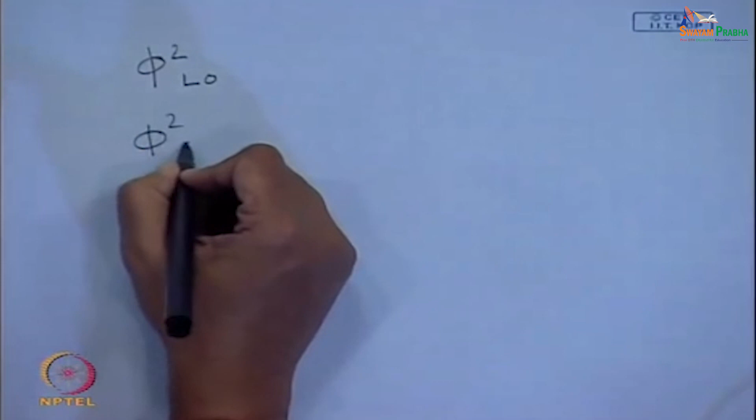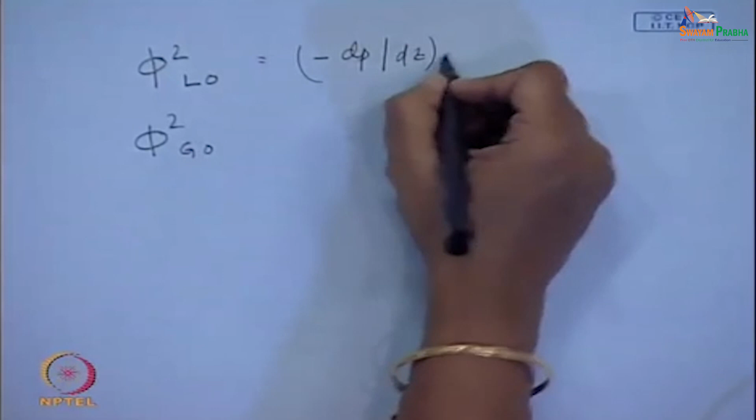The first one was phi square LO. Remember, these subscripts usually we use as capital. Then there was phi square GO, usually we use them in terms of liquid. This is minus dP dz divided by minus dP dz when the entire mixture flows as liquid.

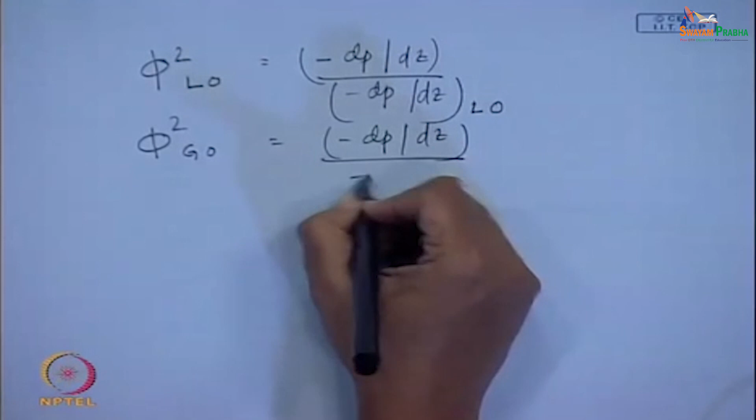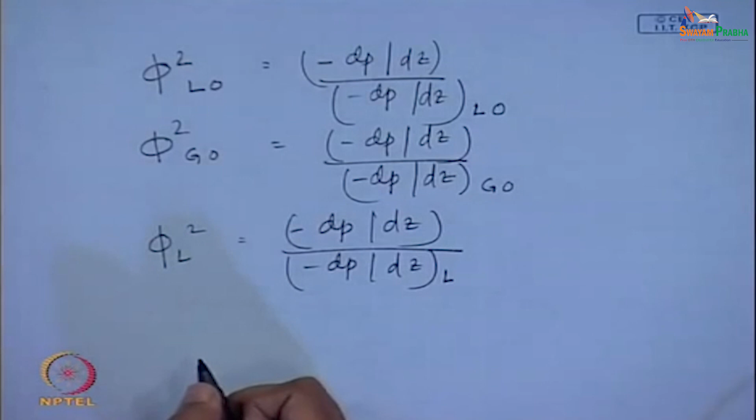Okay, this was just from analogy, expressed as a ratio of the entire mixture flowing as gas. And then we had phi L square, where the liquid portion of the mixture is expressed as a ratio of the liquid portion of the mixture flowing alone in the pipe, and phi G square, which is the gas portion of the mixture flowing alone in the pipe. So these were the 4 definitions that we had already given.

At this particular juncture, I would like to mention that usually these correlations are expressed in terms of phi L square and phi G square. The basic assumptions on which the empirical relationships for frictional pressure gradient are based are 3: constant but not necessarily equal velocities for gas and liquid phases, attainment of thermodynamic equilibrium between the phases, and use of empirical correlations or simplified concepts to relate the two phase multiplier as well as void fraction alpha to independent variables of flow.

So first we would like to relate the two phase multiplier, and then naturally if the two phase multiplier is related with that particular parameter, alpha should also be related. Accordingly, we will find out empirical correlations to relate the two phase multiplier as well as the void fraction to independent variables of flow.

Once this can be done, we find that the frictional pressure gradient can also be calculated, and once alpha is known, rho Tp can also be calculated, u1 and u2 can also be calculated. Therefore, the frictional pressure gradient can be obtained from this particular equation.

Now, here I would like to mention that out of the 4 definitions of phi square which I have already written down just now, usually we adopt phi L square and phi G square, rather we correlate phi L square and phi G square for our purpose.

We do not use phi LO and phi GO; usually these are used when we encounter change of phases, or when there is boiling, condensation, etc., when a single phase, say a saturated liquid or a saturated vapor is entering and change of phase occurs. Under that condition, if we take phi LO square, phi GO square, then it is much more convenient, because the liquid or the vapor was flowing alone in the tube at the entry condition.

But under normal circumstances, when we are developing the two phase multiplier correlations from the separated flow model, we assume from the very beginning both phases are present. In that case, we have found it much more convenient to use phi L square and phi G square. Why is it more convenient?

Because we will soon see that these two multipliers conform to certain limiting conditions which are not obeyed by phi square LO and phi square GO. Just because of that, we would like to prefer to correlate phi L square and phi G square. Now, what are those limiting conditions? Let us see what are those limiting conditions.

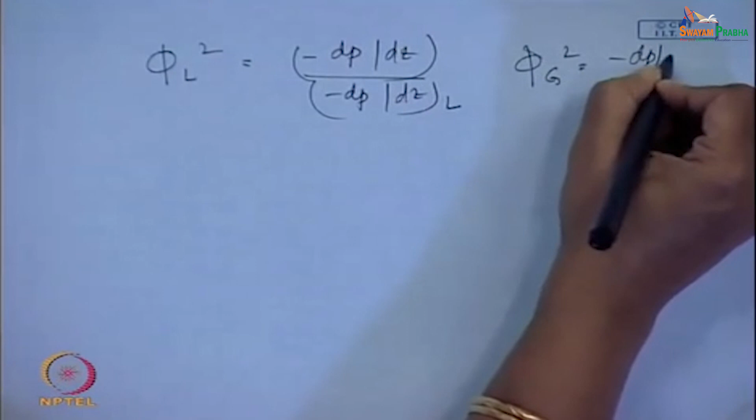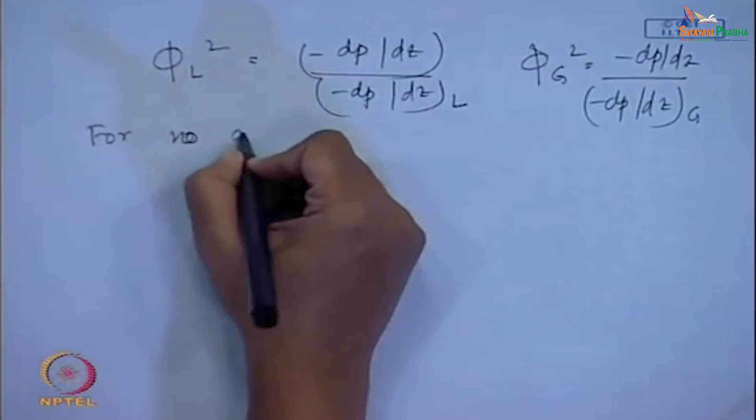Now, for no gas flow, what will you get? Let me write down the definitions once more. Phi L square equals minus dP dz by minus dP dz liquid. Phi G square is minus dP dz by minus dP dz gas. Now tell me, for no gas flow, what will you get? What should be the value of phi L square and phi G square for no gas flow?

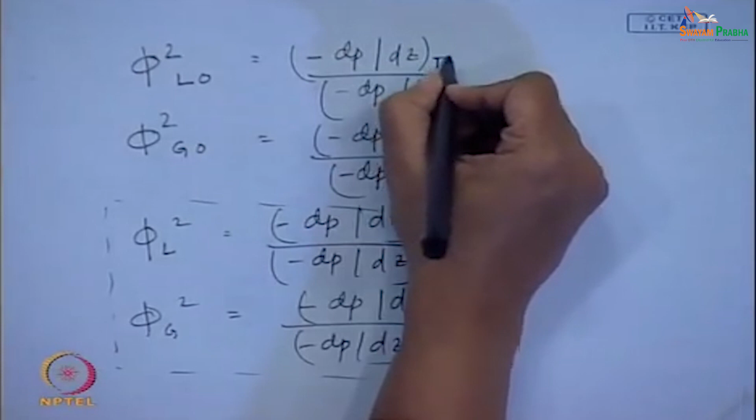What is 1 by phi L square equal to for that particular case? Only for no gas flow, meaning only liquid is flowing. So 1 by phi L square will be equal to, since only liquid is flowing. So therefore, these are all two phase pressure gradient. Here also I would like to make the changes, they are all two phase pressure gradient.

I am very sorry, in case I miss it, just remember that they are all two phase pressure gradient. Now, you tell me, when there is no gas flow, then naturally it is only liquid which is flowing through the pipe, isn't it? So therefore, under that condition, 1 by phi L square becomes 1.0. And what about 1 by phi G square? It becomes 0. Just for this I have defined them not as phi L square and phi G square, but as 1 by phi L square and 1 by phi G square.

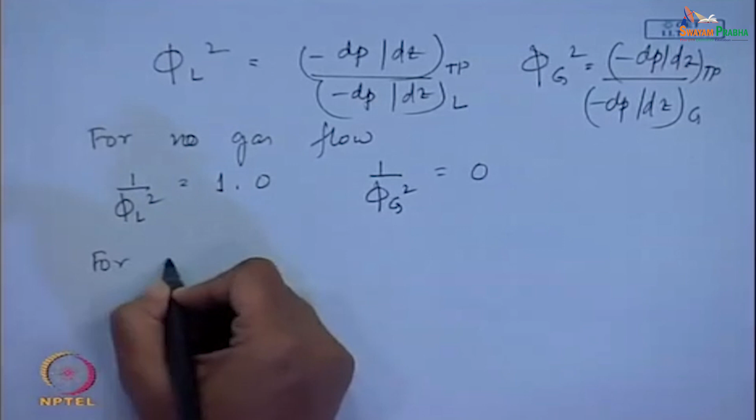Similarly, for no liquid flow, I also have them in my presentation. You can see the PPT which I have prepared.

Here also for no liquid flow, naturally what do you have? It is 1 by phi G square equals to 1 and 1 by phi L square equals to 0. Remember, these are the limiting conditions which phi LO square and phi GO square would not have conformed to. So when there was no liquid flow also, we would find some value of phi square LO.

Because what do we assume there? We assume that the entire mixture is flowing as liquid. So when there is no gas flow also, the liquid flow would be there. Do you understand? So such limiting conditions would not have been subscribed by your phi square LO and phi square GO.

Another limiting condition that is also obeyed by this is the relationship between phi L square and phi G square at the critical point. All of you know what is the critical point? What happens at the critical point?

The two phases cannot be distinguished at the critical point, that is the definition. Why does that happen? Rho 1 becomes equal to rho 2, mu 1 becomes equal to mu 2, and therefore all the properties of the two phases become identical.

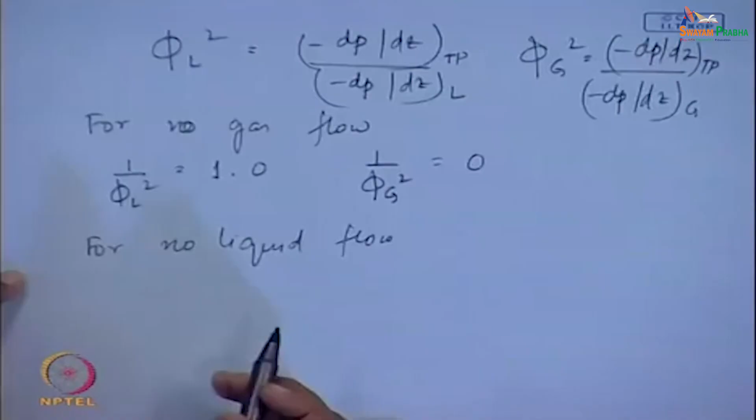Now let us see how the relationship between phi L square and phi G square change at the critical point. What is the basic definition of these two? So here I will just complete it. This was 1 by phi L square equals to 0 and this was 1 by phi G square equals to 1.

Anyhow, now at the critical point, what do you get? We find that at the critical point, or rather let us first find out the expression and then we will be substituting the expressions for the critical point.

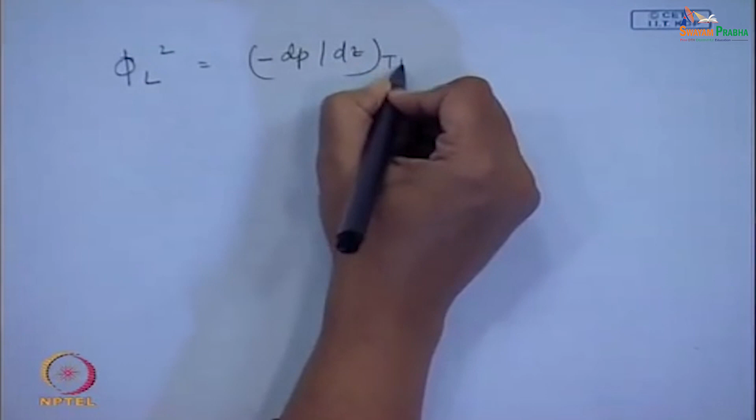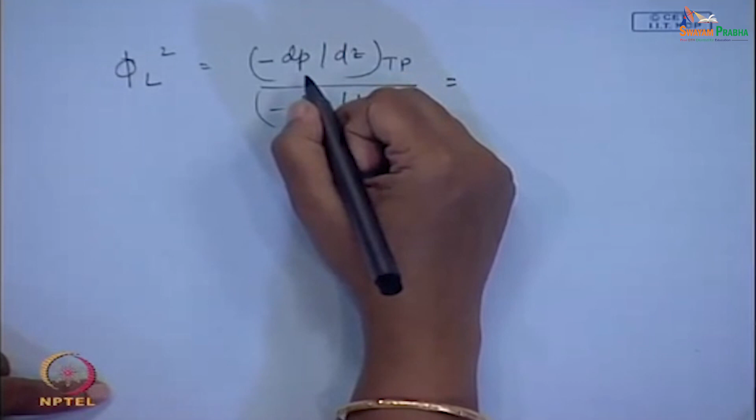So what is the definition of phi L square? It is, as I have just now written down, the two phase pressure drop divided by the pressure drop when the liquid flows alone in the pipe. Now if we substitute the basic definition, there is one more thing which I had forgotten to mention.

Now these empirical approaches have been derived under certain conditions. If you observe, these particular derivations have been derived under conditions of no phase change, no acceleration pressure drop, and negligible body force effects. That means, for a horizontal pipe under isothermal two component flows. Do you agree with me? It has to be a horizontal pipe under two component isothermal flow.

Yes or no? So if that is the case, then what do we find? Your g cos theta term cancels out. There is no acceleration pressure drop, this term cancels out, and therefore under that condition your pressure gradient comprises only of the frictional pressure drop, is not it?

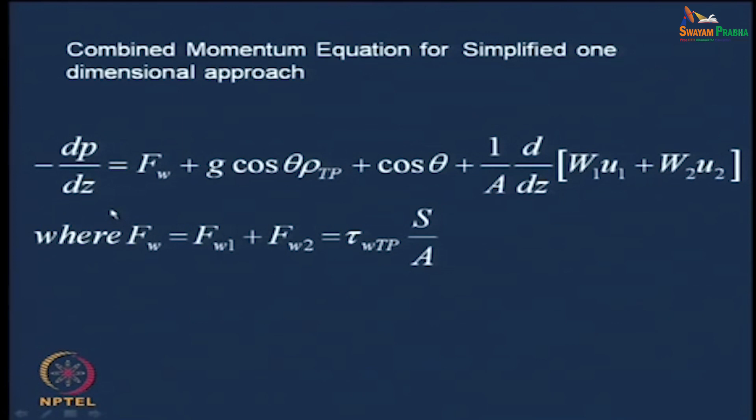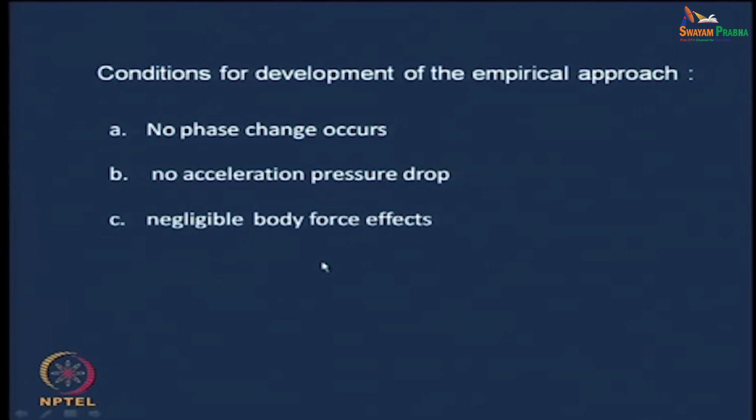So therefore we find that these particular correlations, most of the empirical approaches, have been developed under conditions of no phase change, no acceleration pressure drop, and negligible body force effects, under which we can write minus dp dz two phase. This comprises of minus dp dz frictional component of the two phase.

So this can be written, and later on some modifications were there in order to incorporate effects when body force effects and acceleration pressure gradients become important. But naturally the more important they become, the less accurate these correlations become. So under this particular condition the correlations were developed.

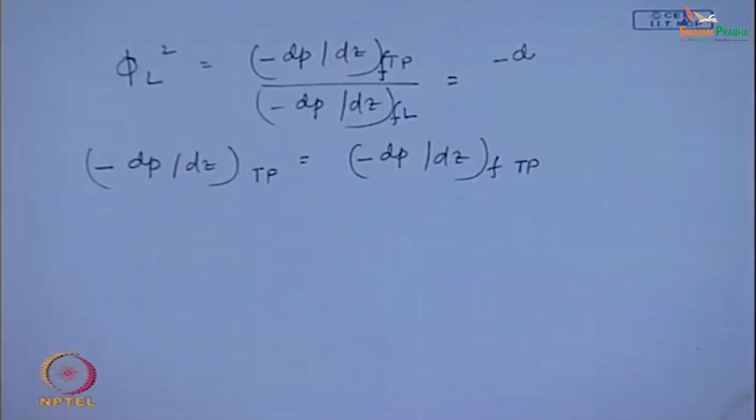So if this is applicable, then in that case your phi L square becomes - here only I will write down - this is frictional pressure gradient of two phase, and this also becomes frictional pressure gradient of the liquid phase, is not it? So therefore, by definition, what is this?

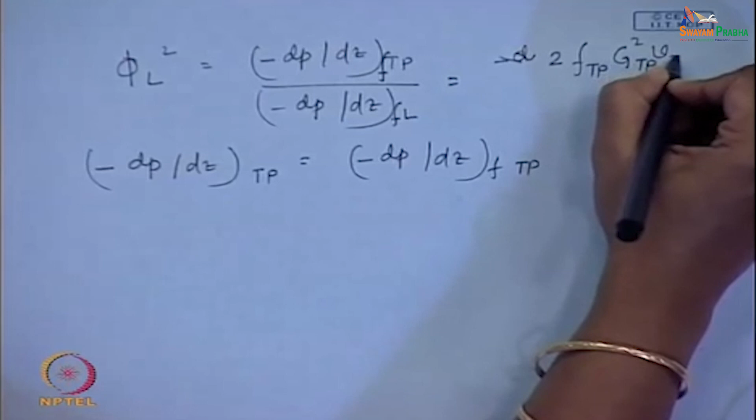By definition, this becomes 2 FTP, correct me if I am writing anything wrong, g square TP VTP by D, yes or no, divided by 2 FL g square TP into 1 minus x square, is not it?

This is the amount of liquid which is there - g into 1 minus x is the amount of liquid which is contained in the two phase mixture, right. This will be VL or V1, whatever you want, and this will be divided by D. Do you agree with what I have written, yes or no?

Fine. Same, or in other words, here in the same way your minus dp dz frictional for the gas phase, that also can be expressed in a similar way.

So therefore we find what is the expression of phi L square when these particular assumptions which I have written down in my transparency - under these assumptions, what is the expression of phi L - then we find that these cancel out, these cancel out, D cancels out. So therefore this reduces to FTP VTP by FL 1 minus x square VL, yes or no?

Is this portion clear to all of you? Fine. Now, at the critical point, what do you get?

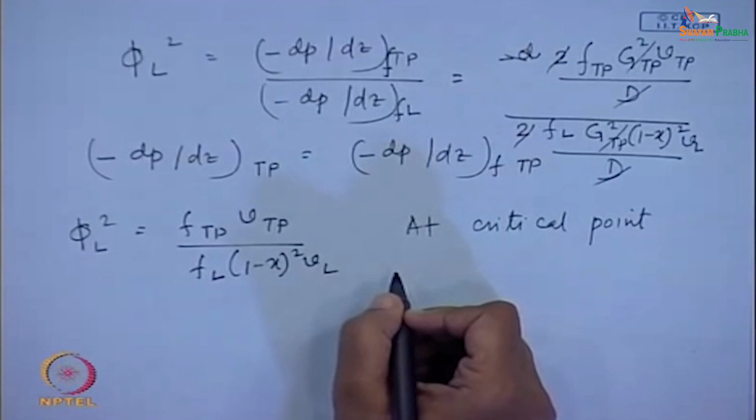At critical point, what do you get? Rho 1 equals to rho 2, or V1 equals to V2, is it not? So, therefore, V L equals to V G equals to V TP, yes or no? So, therefore, these two also cancel out. Do you get this?

Right, so therefore this becomes F TP by F L into 1 minus x whole square. Now, what is the expression of F TP? Can you tell me? This F TP is a function of Reynolds number. So, therefore, this becomes a function, or this is K mu TP by dg whole to the power minus n.

K mu TP by dg whole to the power minus n. You agree? Achha, same way F L, this is equal to K mu L by, we can write it in this dg into 1 minus x whole to the power minus n.

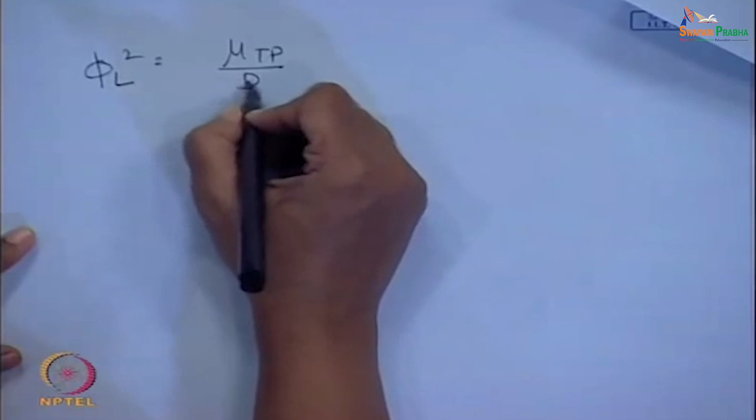Yes or no? So, therefore, here we can write it down as this is equal to - I have to shift to the next page - this is equal to phi L square, this is equal to mu TP by dg whole to the power minus n divided by mu L by dg into 1 minus x whole to the power minus n, 1 minus x square. This is the relationship which we get.

Again at the critical point, we know mu 1 equals to mu 2 equals to mu TP. So, therefore, at critical point what do we get? Mu TP's, the mu's cancel out, dg they also cancel out.

Okay, fine. So, what is the final thing that you get for this particular case? What is the final expression that you get? It is 1 minus x whole to the power n by 1 minus x square. This is equal to phi L square. Yes or no? Just check up whether I am doing things correctly or not.

Okay, similarly, phi g square, what will you get? For phi g square, it is going to be x to the power n by x square will be equal to phi g square. So, we find that phi L, the relationship between... minus, what happened? It is all right only, is it not?

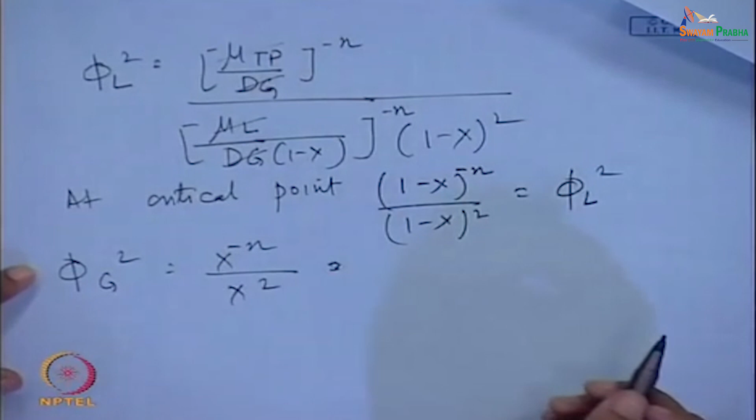Oh sorry, now here also I made this mistake, is it not? Minus n, sorry, very sorry. Fine, okay, in other words you can just write it down as minus n plus 2. Achha, so therefore what do we find?

That the relationship between phi L square and phi g square at the critical point will depend on whether the flow is laminar or turbulent. Yes or no? Okay, because we find that at the critical point, phi L square is a function of x and n, is it not? And in this particular case also it is a function of x and n. So, therefore, the relationship between phi L square and phi g square at the critical point will depend upon whether the flow is laminar or whether it is turbulent.

If it is laminar, then what do we get? For laminar flow, n equals to 1, very correct. So, therefore, phi L square will be equal to - come on - phi L square, it is going to be 1 minus x, 1 minus x only, whole to the power minus 1.

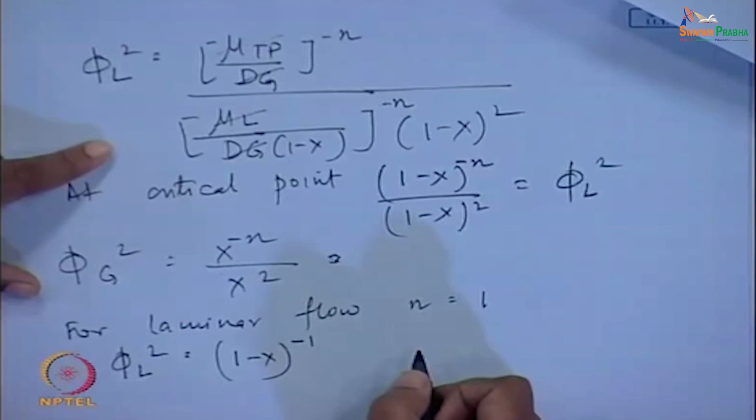Check it up, check it up. How can it be minus 3? Just check it. N is 1, so, therefore, this is 1 by phi L square if I make it, then in that case, okay, let me make it 1 by phi L square, then this is going to be 2. Just then probably I have made a mistake, just a minute, let me just check up, maybe somewhere there is a mistake which I have made.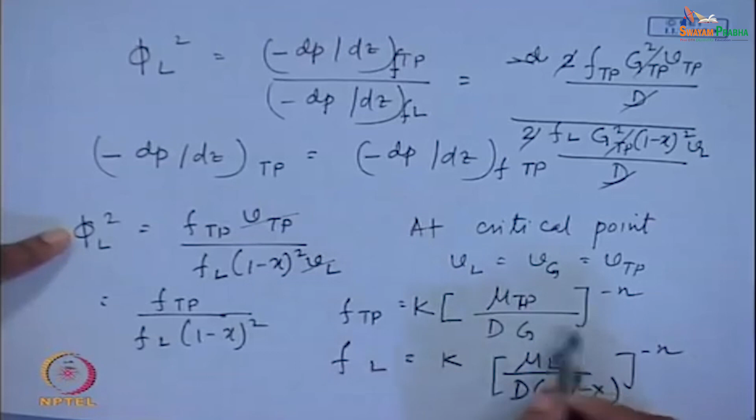Achha, FL by FTP, what did I get? There probably I have made a mistake. Achha, so suppose I start from the very beginning for the laminar flow, then this becomes minus 1. Suppose for laminar flow, if I start from the very beginning, okay. So, phi L square becomes - this is minus 1, this is minus 1 - and then in that case we get FL by FTP. In this particular case, what do we get? FL by FTP, this is equal to 1 by 1 minus x, very correct.

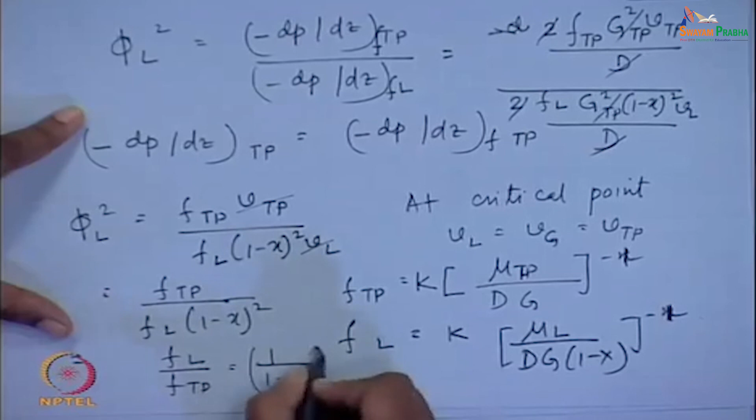Okay, and in the same way we will get, just a minute, where FL by FTP, next page. Oh, here na.

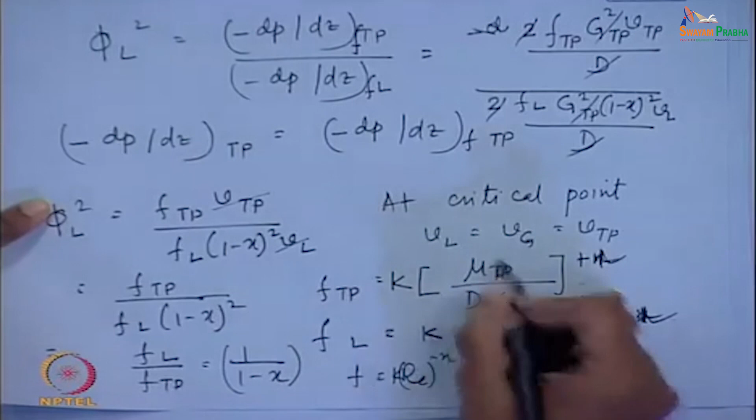No, here I had made a mistake, very sorry. This f equals to K RE to the power minus n - I had written 1 by RE, there I made a mistake. Since this is 1 by RE, it has to be plus n. None of you pointed out the mistake. From here itself I started making the errors. So this has to be plus n - is it correct? Because the relationship is f equals to K RE to the power, and I had already written 1 by RE in this particular case. There actually I made a mistake, I am very sorry about it. Now it is all right, is not it?

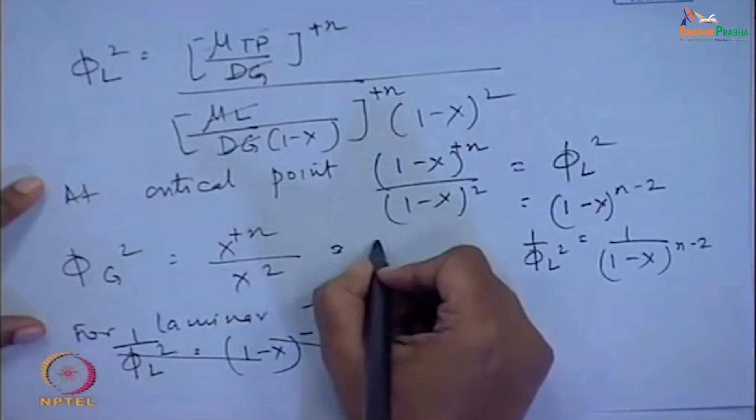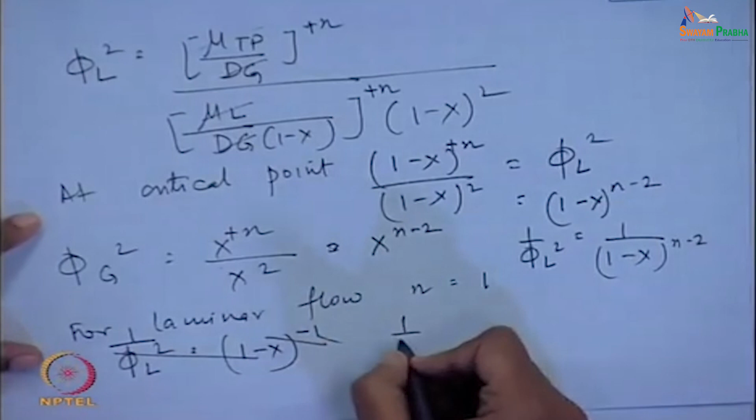Very sorry. So, phi L square equals to 1 minus x to the power n minus 2, or in other words 1 by phi L square equals to 1 by 1 minus x whole to the power n minus 2, and phi g square will be x to the power n minus 2. I have just made it the denominator. And this one is going to be 1 by phi - I am writing it as 1 because these two relationships will come out in a very straightforward manner.

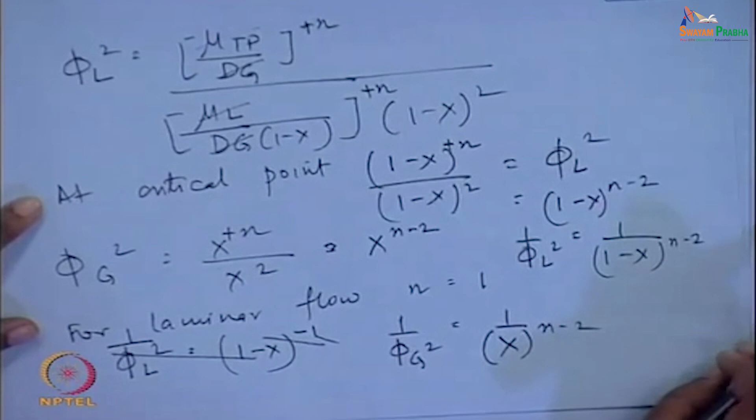Now, for laminar flow, what do you get? For laminar flow, your n equal to 1, is not it? So when you get n equal to 1, what do you get? One by phi L square - so you just do it and you see how you are getting plus: you add 1 by phi L square plus 1 by phi g square. This becomes 1 minus x plus x equal to 1 for laminar flow, correct.

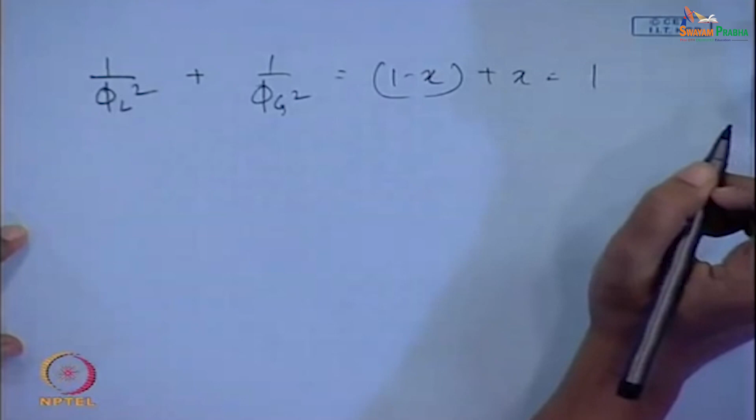For turbulent flow, suppose - this is for laminar flow, n equals to 1. Now for turbulent flow, what will you get? Turbulent flow, n equals to, generally for Blasius type of equation, if we use that, n equals to usually 1/4, is not it? So if you substitute that, we find that we calculate 1 by phi L square whole to the power 4 by 7 plus 1 by phi g square whole to the power 4 by 7, so that we can have a 1 at the end, just for that reason.

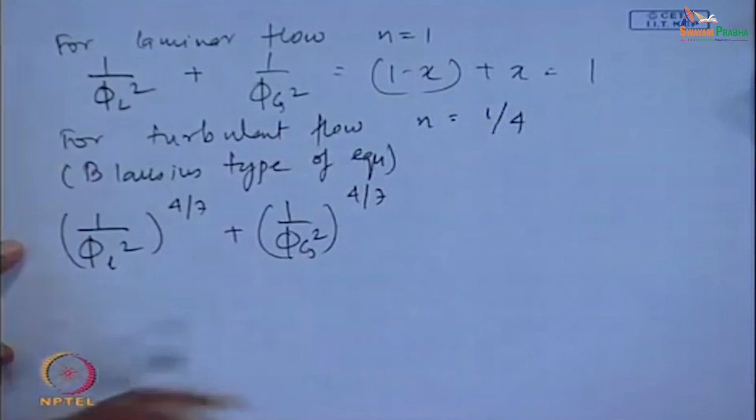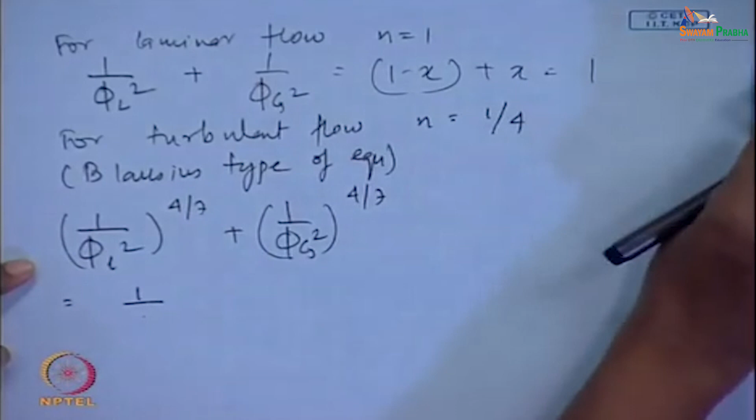If you just calculate it you can find out what you are getting - this will become 1 by... suppose in this particular case we know 1 by phi L square was 1 by 1 minus x whole to the power n, 1/4 minus 2, is not it, plus 1 by x to the power 1/4 minus 2. So in that case it is going to be 7 by 4, 7 by 4. So therefore this becomes equal to 1.

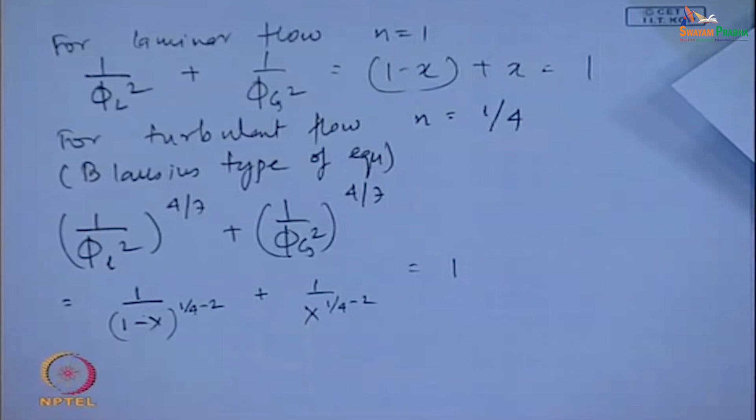So now is it clear what are the limiting conditions to which the relation between phi L square and phi g square conform? The limiting conditions, in a nutshell: for no gas flow, 1 by phi L square equals to 1 and 1 by phi g square equals to 0. Confusions remaining now? Just do the derivation. See, these are small derivations, they come just from single phase fluid flow - there is nothing two phase in this. But please remember, whenever you are doing any derivation for your exams, start from the very basics, start from the definitions, and then proceed. Remember this.

So in a nutshell, what are the limiting conditions of the correlation? For no gas flow, 1 by phi L square equals to 1, 1 by phi g square equals to 0. For no liquid flow, 1 by phi g square equals to 1 and 1 by phi L square equals to 0. And at the critical point we have two different relationships depending upon whether the two phases are in laminar flow or turbulent flow. For laminar flow, as is evident, it is 1 by phi L square plus 1 by phi g square equals to 1. For turbulent flow, assuming a Blasius type relationship, we get 1 by phi L square to the power 4 by 7 plus 1 by phi g square to the power 4 by 7 equals to 1. So remember, we have started deriving the relationships between the two phases - these things have more or less been covered.

Certain empirical correlations have been proposed. These empirical correlations relate phi L square and phi g square based on certain assumptions. The first assumption is that the flow occurs under isothermal two component flow conditions in horizontal pipes, or more explicitly, for conditions with negligible body forces, no acceleration pressure gradient, no phase change, and where the total pressure gradient comprises of the frictional component only. Under these circumstances, these derivations have been made.

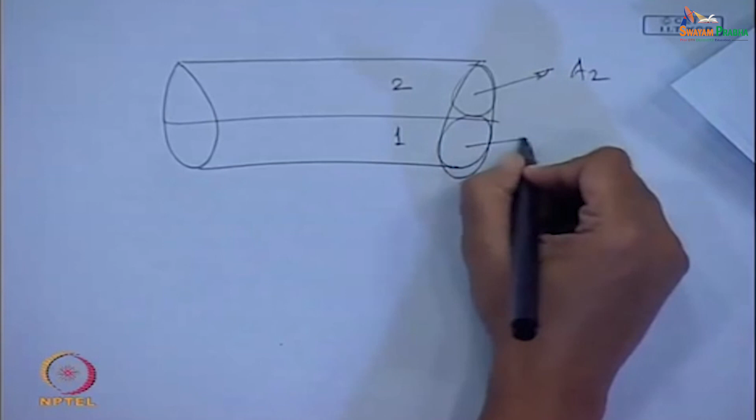What is the next assumption? Assumption 3: the pressure drop in each imagined cylinder is the same as in actual flow - quite natural. So imagine a pipe where fluid 2 is flowing here and fluid 1 is flowing here. We assume they are flowing in two separate cylinders such that the cross sectional areas add up to form the total cross sectional area of the pipe, which is pi by 4 d square.

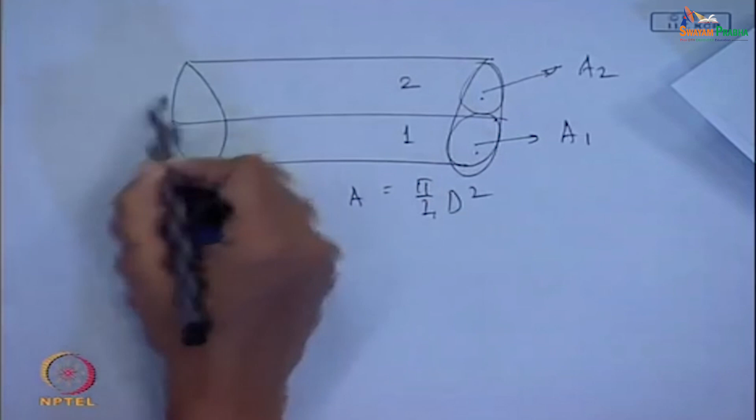The next assumption is that they do not interact at the interface - meaning they flow irrespective of the presence of the other, not knowing the other fluid is present. Under that condition, the pressure drop across cylinder 2 will equal the pressure drop across cylinder 1, which will equal the pressure drop across the total conduit - just like a parallel connection where voltages are the same. So considering this second assumption, the pressure gradient across the entire cylinder equals the pressure drop across the liquid cylinder, cylinder 1, which equals the pressure drop across the gas portion.

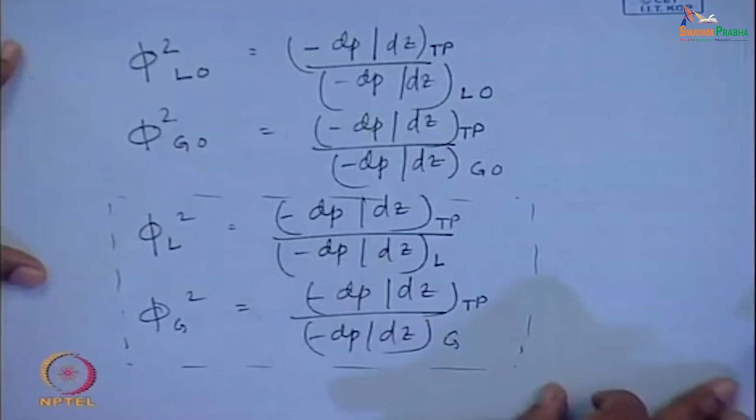Let us remember, we had already defined phi L square and phi G square - lots of definitions are coming into picture. If you remember, L was when liquid was flowing alone in the pipe, and G was when gas alone was flowing in the pipe. Now when we define this, this is the liquid portion when both phases are flowing together. So definitely the cross sectional area occupied in this case will not be equal to the cross sectional area occupied when the liquid portion is flowing alone in the pipe. Do you get it?

So this dP dz L and this dP dz L, these cannot be the same. So we have to remember it and denote this with a different nomenclature. We will just put liquid portion, gas portion. Whatever you want, you can use your own nomenclature, it does not matter, but you have to remember one thing.

What is the assumption I have written? The assumption is pressure drop in each imagined cylinder is the same as in actual flow. So here the pressure drop refers to the pressure drop across the liquid cylinder, in this case across the gas cylinder.

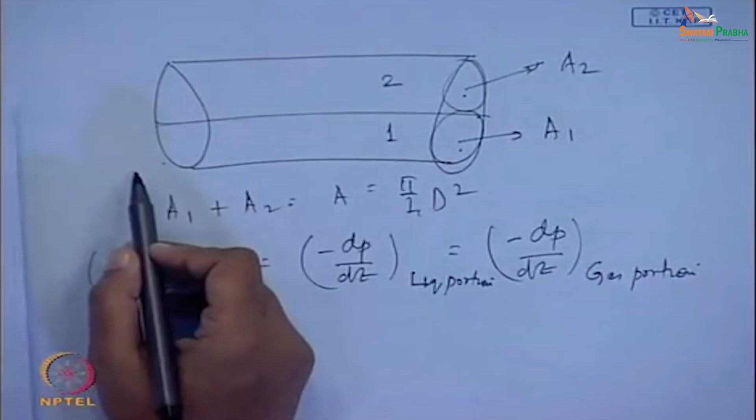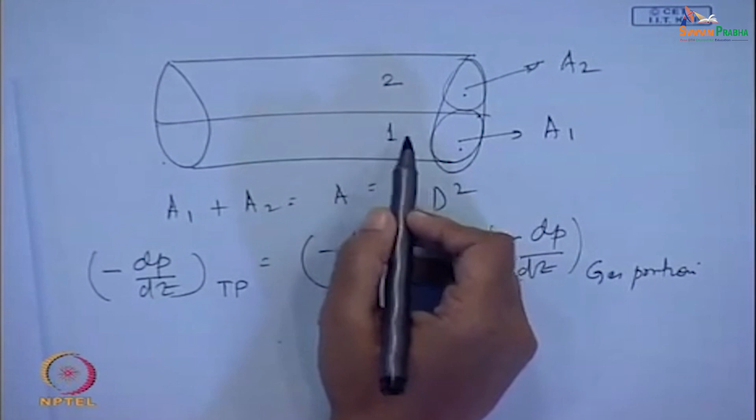And the pressure gradients which I had defined for the two phase multipliers refer to the pressure drop which would be encountered when the liquid, which is flowing here only in this portion, now flows through the whole pipe. Is it clear? Since they occupy different cross sectional areas, naturally the friction factor and everything is going to change, so this particular pressure drop and this particular pressure drop are going to be completely different.

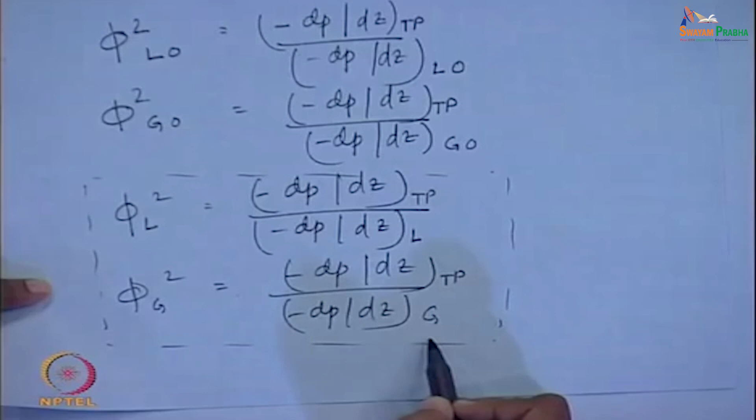This part you are supposed to remember. So there is a need, since we will be dealing with this much more, that when liquid or gas flows alone in the pipe, they will be denoted by a subscript capital L or capital G. And when it is the liquid portion which is flowing, then we put it as either liquid portion or liquid cylinder, whatever it is. So this is the third assumption which we are going to give.

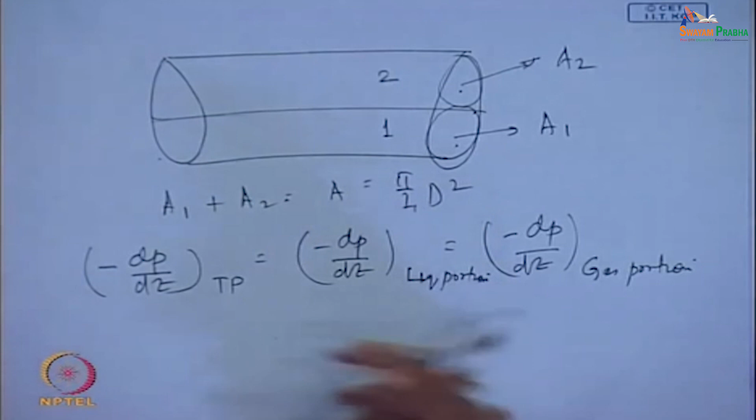And the fourth assumption, which you already know, is that we assume the pressure drop is mainly due to the frictional component, which I have also put down in my PPT. So the fourth assumption which has been put down in my slide is this: minus dP dz primarily comprises of the frictional pressure gradient. Is it clear?

Are these two assumptions clear? The first assumption was that it is assumed to flow in two separate cylinders where the two cross sectional areas add up to form the total cross sectional area of the pipe. Second assumption is that the two phases do not interact with one another.

Remember, this is the most severe assumption, and we will see at one point why it does not give completely accurate results. The primary reason is assumption 2 which I have put down in my transparency, which tells you that the frictional pressure - the two phases do not interact with one another.

If they do not interact, then naturally it is not two phase flow at all, because in the first class the definition I gave you about two phase flow is that it is the interacting flow of two phases. So remember, if that assumption is not valid, then there is no point. This is the most severe assumption, and we will see that it does not give completely accurate results.

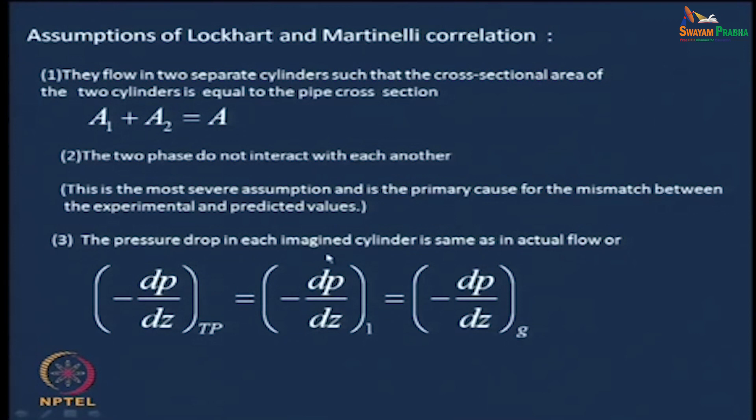So the third assumption is basically an extension of the second assumption. The next assumption is that the pressure drop arises mainly due to the frictional component. How did this assumption come up?

Because these correlations were derived for two component flows - derived for air-water mixtures in horizontal pipes. So in horizontal pipes there was no gravitational component, and a two component air-water mixture means there was no phase change, so there was no acceleration pressure gradient, and they were in circular pipes, so there was no area change as well.

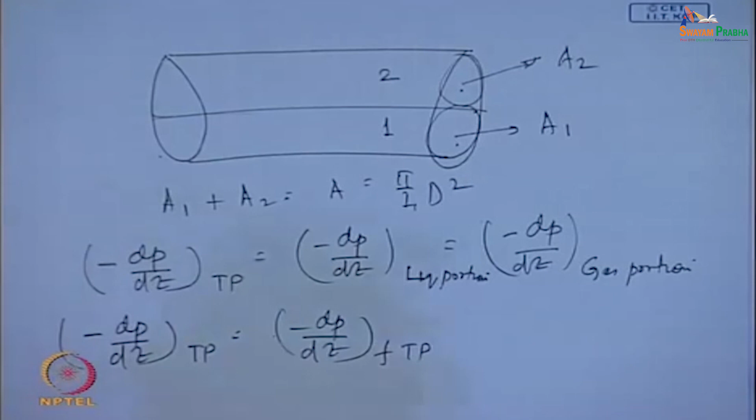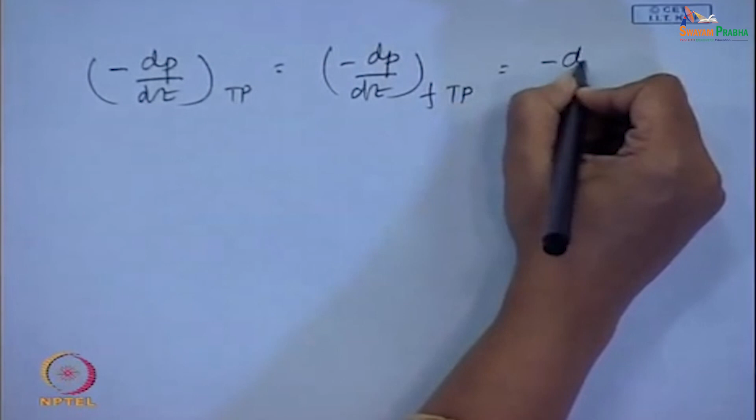So, the pressure drop is mainly due to the frictional component. In other words, minus dP/dz two-phase equals minus dP/dz frictional component of the two-phase mixture. From these two assumptions we get: minus dP/dz two-phase, the frictional component of the two-phase pressure gradient, is equal to the frictional component in the liquid portion, which equals the frictional component in the gas portion.

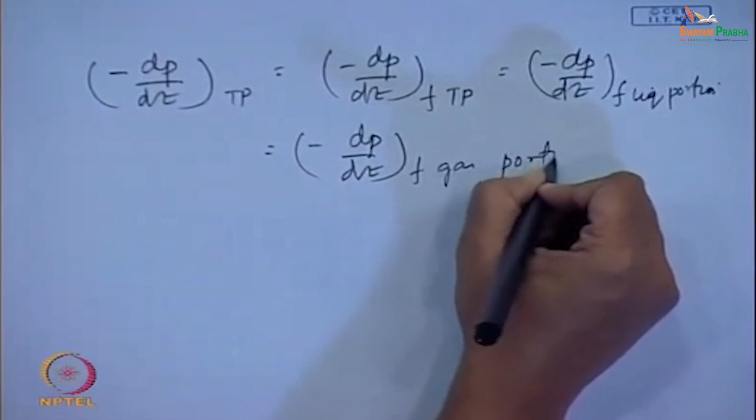So this is the final expression if we couple up all the assumptions. Assumption 1 is this, assumption 2 is AL plus AG equals A. And what is the next assumption?

In order to find out the frictional pressure gradient, we assume it can be obtained if we know the frictional pressure gradient in the liquid portion. In the liquid portion it is simply single phase liquid flowing through the pipe, so this can be obtained from single phase flow equations. This can also be obtained from single phase flow equations for the gas portion.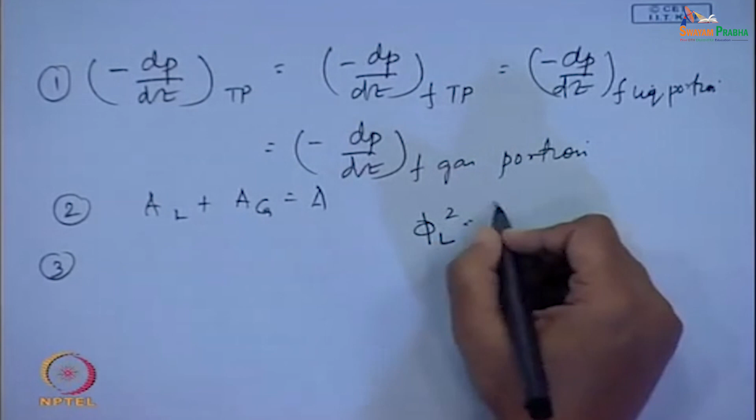My phi L square, this was originally minus dP/dz two-phase divided by minus dP/dz liquid. Now this becomes minus dP/dz frictional two-phase divided by minus dP/dz frictional part of the liquid, because for liquid there is no acceleration, it is a horizontal pipe. So all those assumptions are applicable, or in other words this is nothing but equal to minus dP/dz frictional of the liquid portion divided by minus dP/dz frictional when the same liquid flows alone in the pipe.

Could you get the simplification reduced in this portion? We see that the same liquid is flowing - here through some portion of the pipe, here through the entire portion of the pipe - yet these two pressure gradients are not equal. As a result of the assumptions I had written down, what have I arrived at?

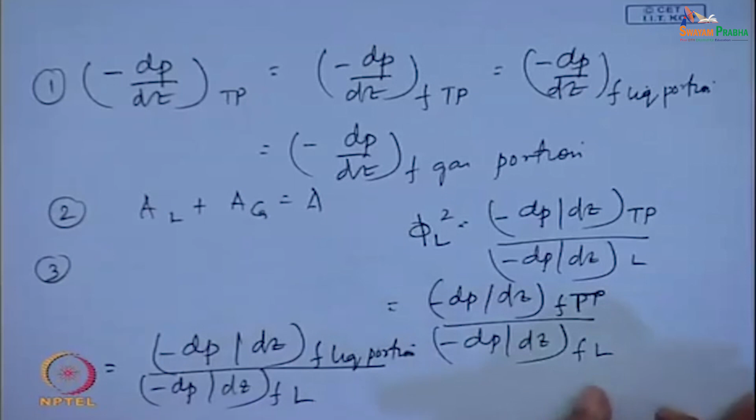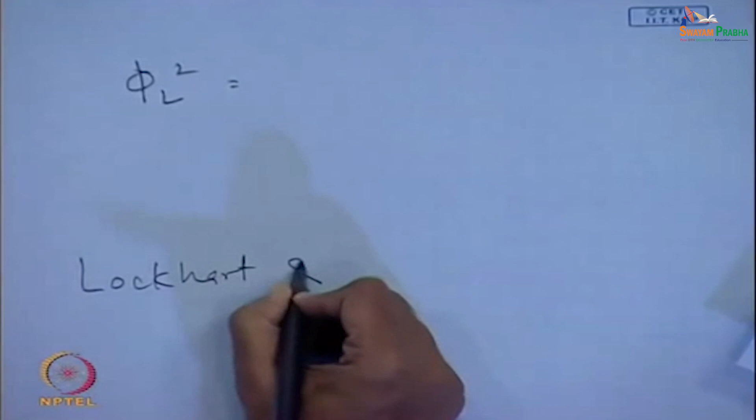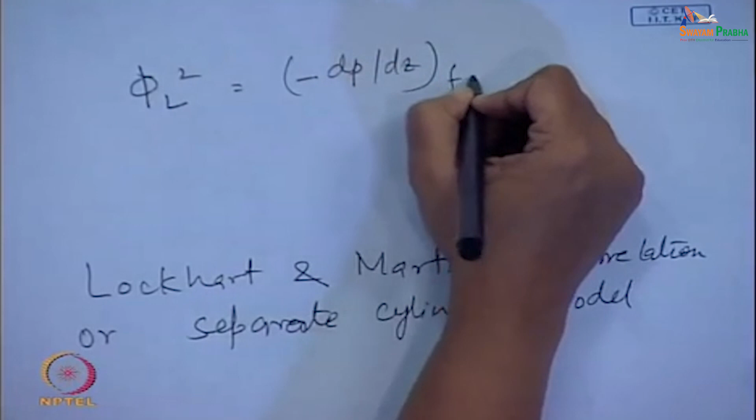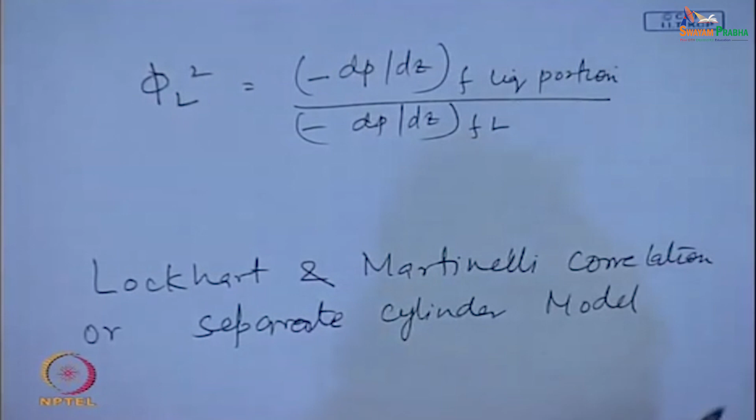I have arrived finally, as a result of this, at the Lockhart and Martinelli correlation - remember the first group which gave this correlation. This is also known as the separate cylinder model. So from this model we get phi L square is nothing but minus dP/dz frictional liquid portion of the pipe divided by minus dP/dz frictional when that liquid flows alone in the pipe.

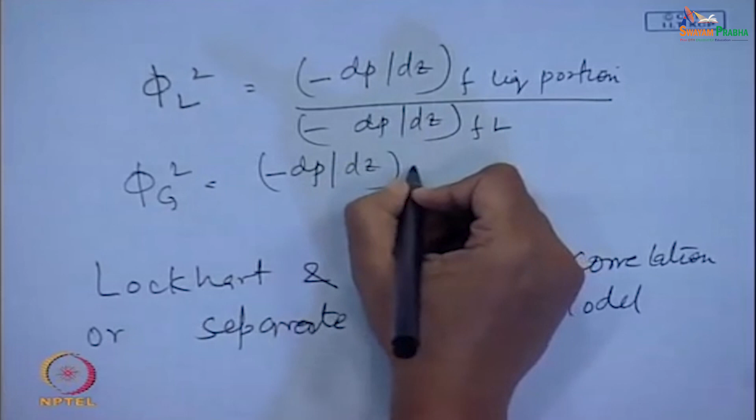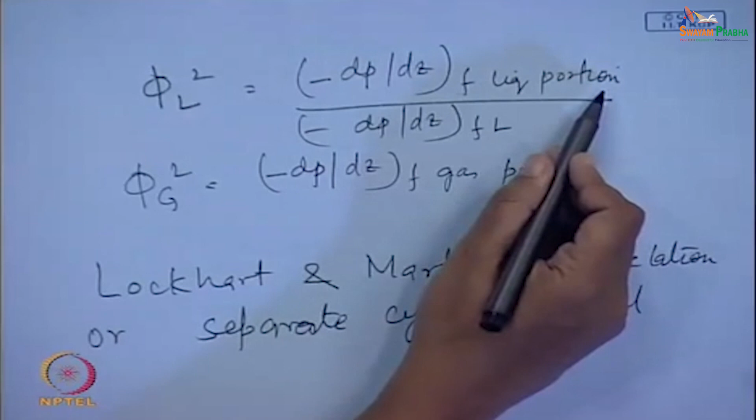Similarly, phi g square, this will be minus dP/dz frictional gas portion. The gas portion and liquid portion frictional components are equal, as I have already shown you - minus dP/dz two-phase frictional component is the frictional component in the liquid portion equals the frictional component in the gas portion. So this therefore becomes minus dP/dz frictional when the gas flows alone in the pipe.

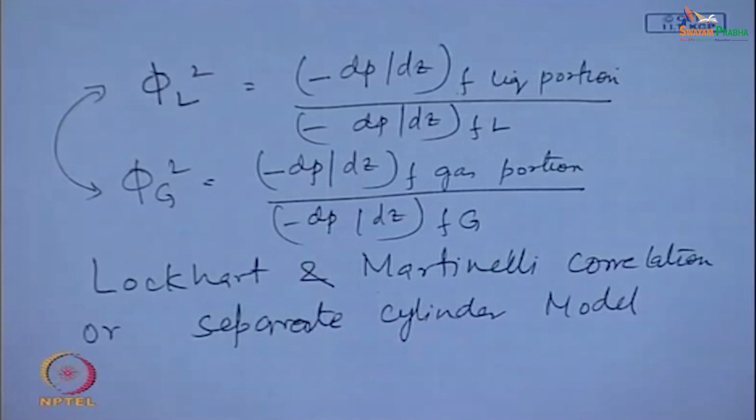So what basically Lockhart and Martinelli did was propose a correlation based on the separate cylinder model, where they tried to correlate these two parameters phi L square and phi g square. More or less the graphical correlation is something of this sort - they tried to correlate 1 by phi g square and 1 by phi L square. We will discuss this graphical correlation, and then by some very simple analysis, we can find the analytical expression for the family of curves shown here.

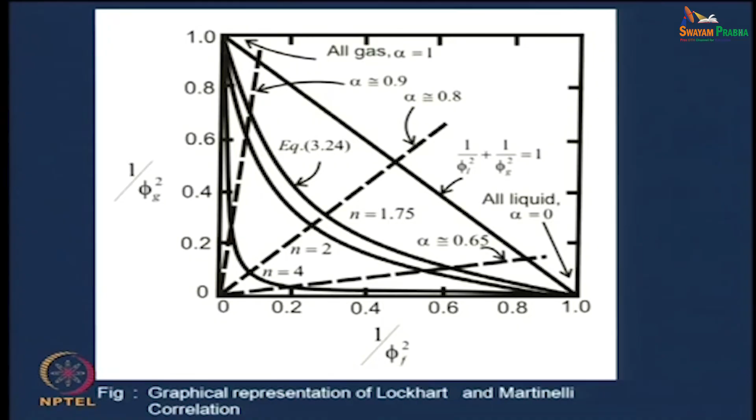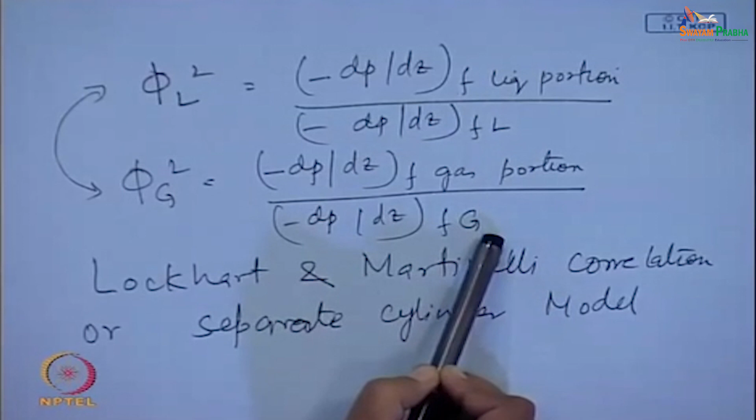Lockhart and Martinelli stopped by proposing this graphical correlation, and subsequently other co-workers - Martinelli, Nelson, etc. - proposed the analytical correlation simply by substituting minus dP/dz F liquid portion and minus dP/dz F liquid flows alone in the pipe correctly from single phase flow equations. They could arrive at an analytical expression relating phi L square and phi g square, and this relation will again depend upon whether the two fluids are flowing in laminar flow, turbulent flow, or whatever it is.